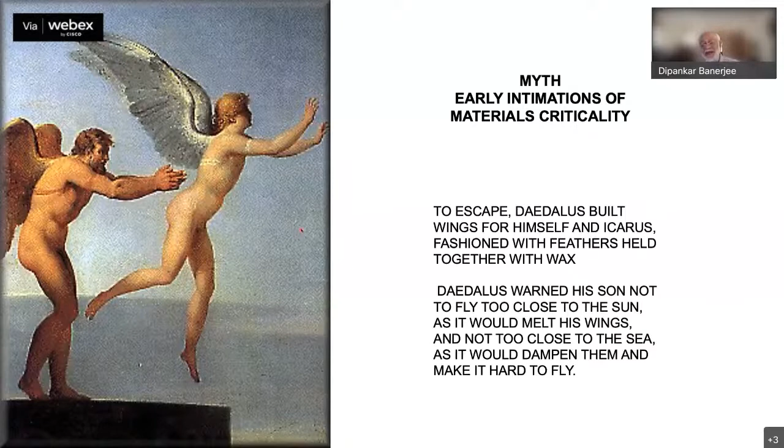So this is a nice parable about materials engineering. It tells you something about the properties of materials, in this case wax. It tells you something about the designer intent and the boundaries within which the materials can be used. And it tells you something about human error as well, because unless you function within the parameters set by the design and the materials, bad things can happen. So this is a good way to understand materials engineering as it is today.

But I also want to remind you that metallurgists, materials people in particular, belong to one of the oldest professions in the world. So first of all, the first great innovation, metal forming, was about 4000 BC, where we learned to soften the native copper, to shape it and to harden it.

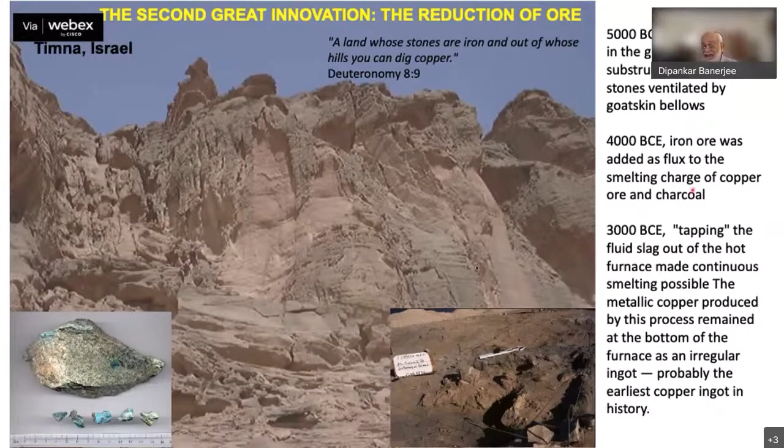The second great innovation involved extraction of copper from its ore, and this was in Israel, again around 4000 BC, using iron ore as a flux and ways to melt this and draw the copper ingot out. And the third great innovation was alloying, in which we learned that tin strengthens cast copper and improves what is today known as bronze, again around 2000 to 3000 BC.

So it's pretty humbling to note that the paradigms in which material science is based, that is the relationship between processing, structure, composition, and properties, these paradigms were actually discovered something like 6,000 years ago.

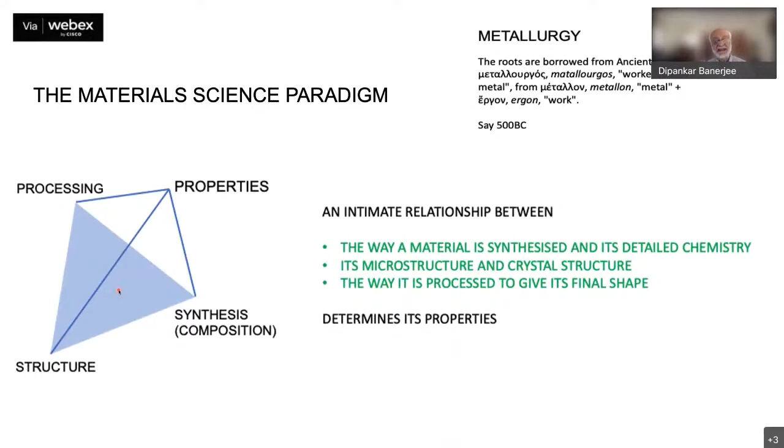I used in the previous slide the idea of structure, and I must talk a little bit about structure, because this is something that most engineers do not recognize as a central feature of materials engineering in this connection between composition, processing, and properties. If you look at a piece of metal, it appears featureless.

But somewhere in the 17th or 18th century, we found that if you prepare the surface of a metal properly, you begin to see features in its surface. And we found that these features actually represent grains or crystals which are oriented in different ways. So you can see today structure at the scale of tens of microns, which could be the grains in the material.

You could see the distribution of crystallites within grains, which could be as fine as 10 to 100 nanometers. You can even today, with modern techniques, see the distribution of atoms within these crystals. So we can see structure at different length scales.

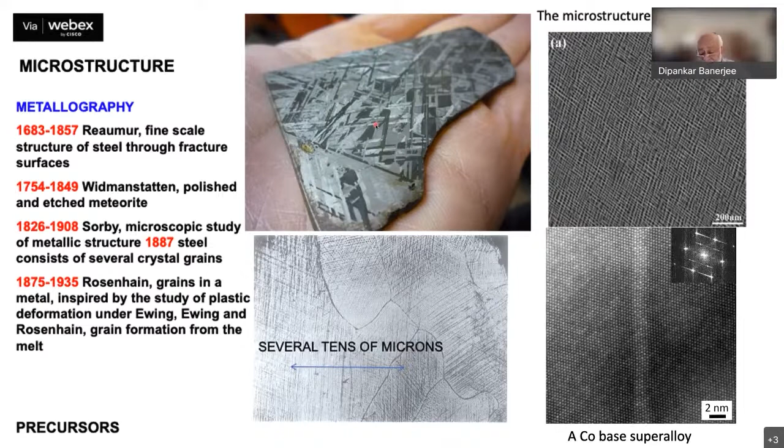We can also see structure when we combine microscopy with spectroscopy. We can see chemistry at this nanometric scale, so we can see the chemistry of individual crystals. We can see the chemistry actually of individual atoms. And through atom probe tomography, we can see distribution of chemical elements in a three-dimensional sense.

And so this very important evolution in our capability to look at what we call microstructure is an important part of the material science paradigm.

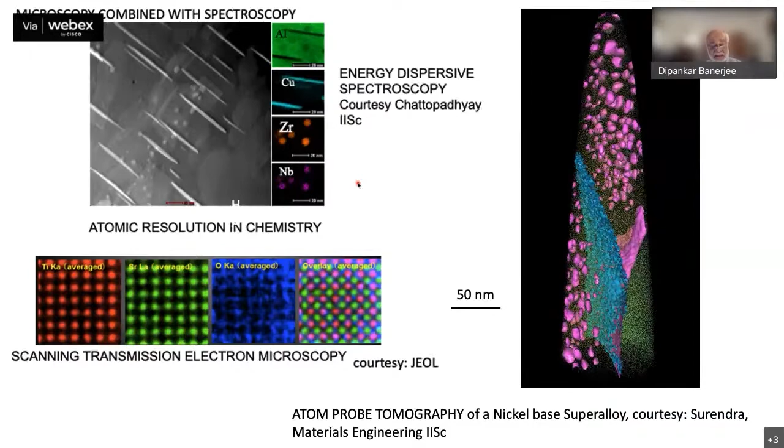So this interaction between defect structure and microstructure to determine properties is a key element of structural materials.

We have learned to process materials at an enormous variety of length scales. 30,000-ton forging presses, for example, are used to make shapes and sizes used in thermal power plants. We can use additive manufacturing to get extremely complex shapes without machining. We can manipulate materials at the thin film level to form integrated circuits. We can form organic-inorganic hybrids, and we can actually manipulate atoms.

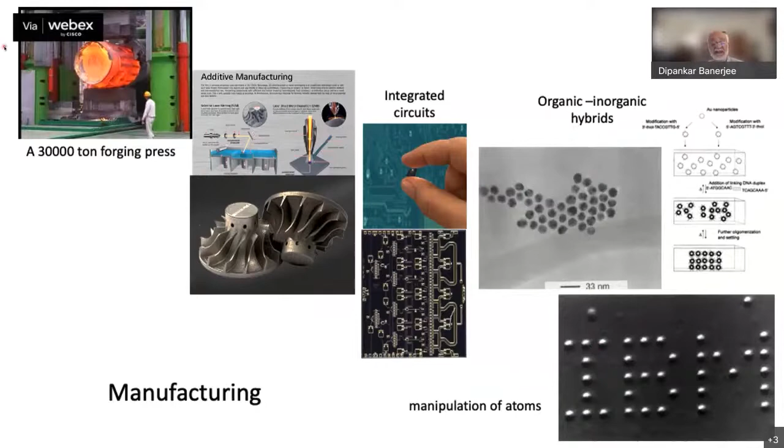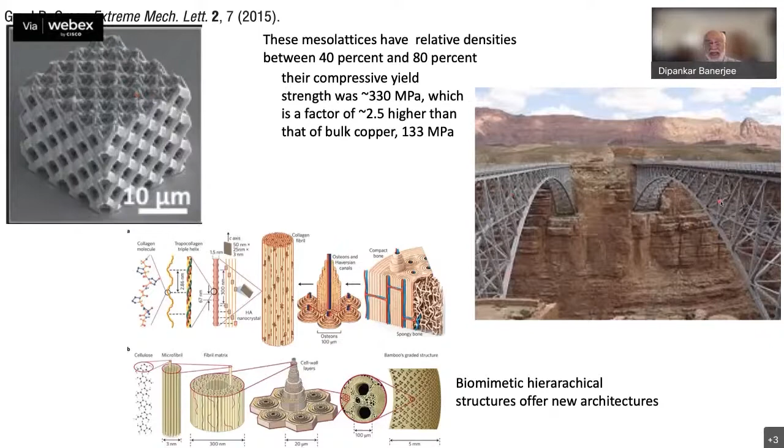This entire range of scales is now available to us as materials engineers to shape the kind of material that we want. We combine microstructure and this ability to manipulate shape with something we call architecture, and we have learned to control the architecture of the metal at micrometer or nanometric scales. We have learned from biological and natural structures how hierarchical structures offer new properties. All of these interact with the object we are trying to make, to provide the kind of properties that we want.

Materials engineering deals with materials at various length scales, but treats materials as heterogeneous aggregates of crystals, chemistry, atoms, and so on. It interacts with the mechanics of materials, which aeronautical or mechanical engineers use, which treats the material as a continuum to develop structural properties or design structures. This interface between materials engineering and mechanics of materials in developing structural integrity is extremely important, and it's important that there is understanding on both sides of this divide on how materials engineers and mechanics people deal with materials in designing structures.

It's important to understand, and this is not very well understood in the non-materials community, that in very conservative applications such as aeronautical applications, it takes an enormously long time to develop new materials. In fact, an article from GE Aviation points out that if you want to introduce a new materials class in an aero engine with no prior application experience, this might take typically 20 plus years. Even the modification of an existing material for a new critical structural component might take up to 4 to 5 years. So what do we do about this?

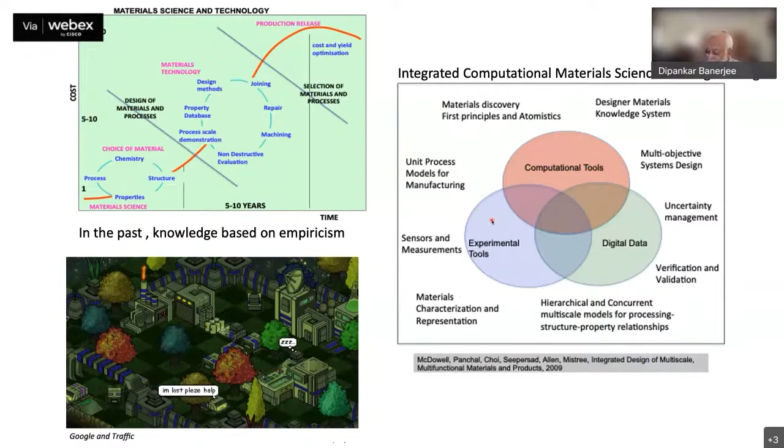Now if you look at aeronautics and the role of materials in aeronautics, we start by looking at energy efficiency in aviation. Over the years we have achieved enormous improvements in energy efficiency, looked at here in terms of aircraft fuel burn per seat relative to the first jet aircraft, the Comet.

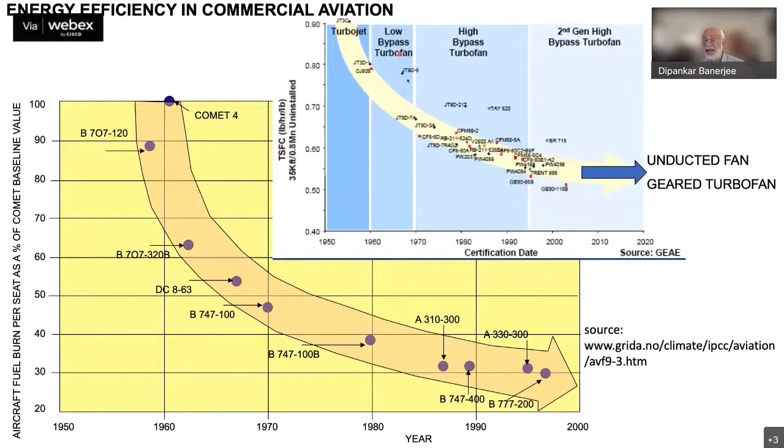We've improved energy efficiency by about 70%, and part of this comes from thrust-specific fuel consumption improvements in jet engines of different designs. A typical combat air patrol of the Tejas, with a radius of action of about 200 kilometers, will use about 4,500 kilograms of fuel. A 10% reduction in structural weight will provide about 2.5 to 5% increase in fuel efficiency.

So amongst the various factors that affect aircraft energy efficiency, the contribution of materials, apart from performance itself, lies in possible weight reductions and in performance through engine thermodynamics, which allows improved engine operating efficiencies. And of course, combat performance metrics are also determined by structural weight.

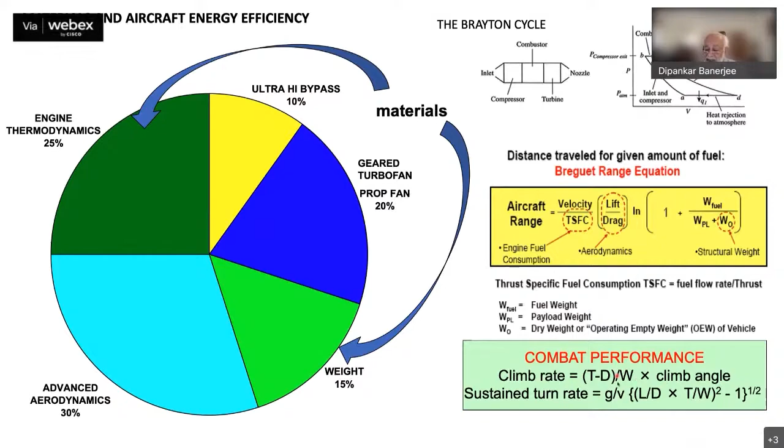If you look at airframes, typically the material you use depends on the sustained Mach number of the vehicle. For high subsonic and low supersonic flight, you're happy to use polymer matrix composites or aluminum because skin heating due to Mach number is limited to about 150 degrees centigrade. As you increase the Mach numbers, skin heating becomes higher, leading to higher airframe skin temperatures, and you have to graduate to different kinds of materials. This fundamentally determines the kind of materials you use in an airframe.

So we start from aluminum used in the First World War to composites, now used in military and commercial aircraft. This is the only aircraft that ever used a titanium airframe, the SR-71, which flew at Mach numbers of about 3.2. Finally, for hypersonic systems, you have to look at refractory materials based on carbon, silicon carbide, and various thermal protection systems.

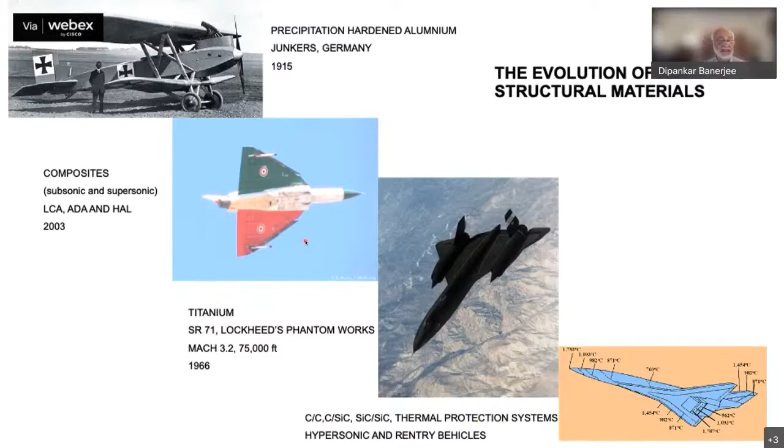I will not talk much about aluminum because aluminum has really given way to composites in critical fuselage applications, due to the lower density of composites as well as their capability to function in environments with moisture, corrosion resistance, and so on.

But I want to use this example as an illustration of the relationship between science and engineering. The basis for aluminum production was in 1886, and the first aluminum copper alloy, known to material scientists as the precipitation hardened alloy, was discovered in 1906. This material was used by the Germans in their First World War military aircraft by 1915. But I want you to note that the understanding of the phenomenon of precipitation hardening from a material science aspect evolved over the next 50 years, far long after it was used in application in 1915.

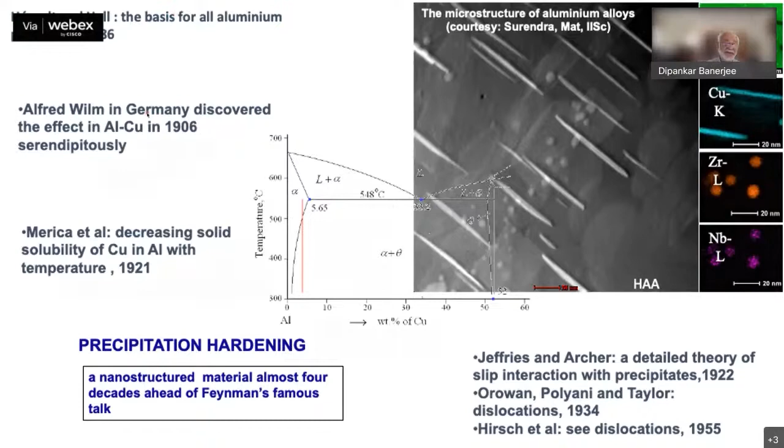So this relationship between science and engineering is not really linear. Science supports engineering, engineering enhances or drives scientific knowledge. Indeed, this improvement in understanding has led to evolution of aluminum alloys with properties well beyond that of the first precipitation hardened aluminum alloy. But now, of course, composites have taken over as airframe materials in subsonic aircraft and so on.

Talking about composites at NAL, you all are so familiar with composite development and manufacturing as part of NAL. But what I want to point out is that there are opportunities for new integrations of material synthesis and design, because you can manipulate composite structure - you can architecture it so as to obtain the precise kind of microstructure needed for the local stresses the material structure will experience.

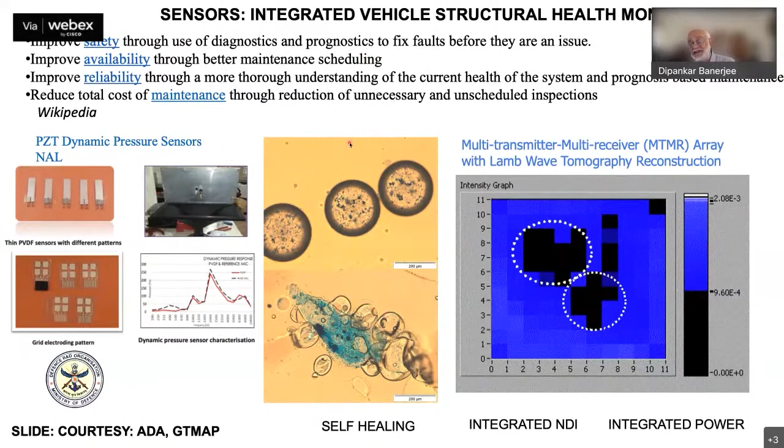For example, bamboo has a higher density of fiber at its surfaces to withstand higher tensile stresses at the surface when it waves in the wind. The other opportunity which composites enable is the embedding of smart sensors and actuators combined with structural design that will allow parts to meet complex multifunctional requirements, such as self-healing and damage assessment. This slide is really an introduction to Ramesh Sundaram's talk later on.

I want to talk briefly about stealth while I talk about airframes. Much of stealth is conferred by shaping the vehicle, as you know. But even as you shape the vehicle, hotspots in terms of radar reflection remain, for example at engine intakes or outlets. You will need materials to provide radar absorption to accommodate what you can do with shaping.

These materials can be very effective, as shown by this near field description of radar reflection with facilities available at the Defense Laboratory in Jodhpur. The varieties of materials that can be used in stealth applications are actually quite enormous, but they can also add to weight. For example, high levels of stealth can add 15 to 20% of structural weight.

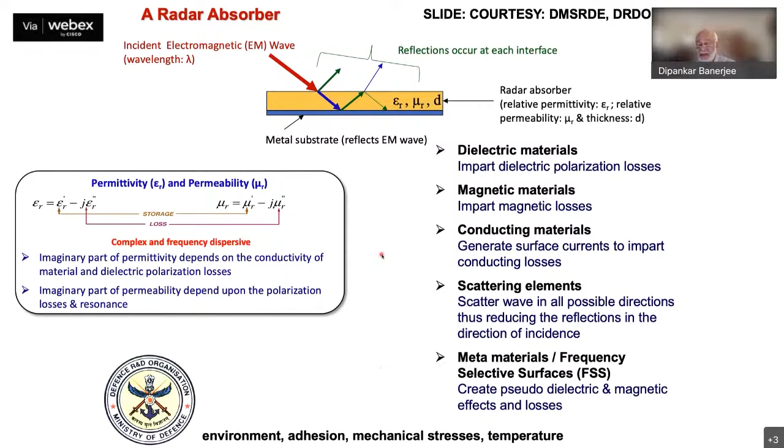So the drivers for stealth are certainly density reduction, but beyond that, broadband absorption capability, mechanical strength, and perhaps frequency selective adaptive protection. The physics of stealth materials is really determined by the physics of electromagnetic wave interaction with the materials. But while understanding the physics, one has to look at the environment, the adhesion of your stealth material to the airframe structure in response to mechanical stresses, temperature, and moisture. The engineering of stealth materials and coatings into airframes is a whole new activity by itself, which we've been doing both in DRDO and at NAL now for quite some time.

I move on to the aero engine. The aero engine is really an extreme environment for materials. Aero engines operate with revolutions of the discs, blades, and shafts at greater than 10,000 revolutions per minute, leading to fatigue. High temperatures lead to oxidation. Birds, sand, and ash ingestion at high velocities lead to various forms of impact damage.

Moisture, impurities in the fuel, and so on can lead to corrosion and erosion. This is truly a difficult, to my mind, one of the most difficult environments for materials, both in terms of design, application, and life.

Three typical classes of materials are used in aero engines. One is titanium, used in the front parts of the engine, the fan and compressor, up to about 550 degrees centigrade. Nickel-based alloys are used in the hottest parts of the engine beyond the combustor, in the turbine, where temperatures can rise as high as 1600 degrees centigrade. And then there is the gradual increasing use of ceramic matrix composites right now in the rear of the engine as convergent, divergent flaps and so on.

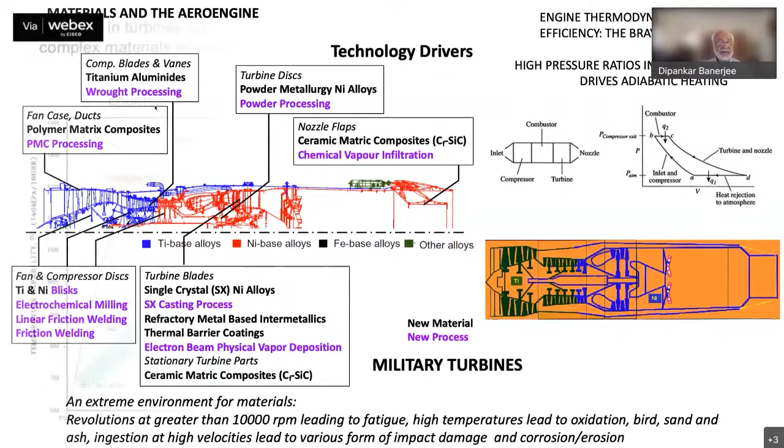Remember that the engine thermodynamics and efficiency depends on the Brayton cycle. So the higher the temperature you can drive the turbine at, the higher the efficiency of the engine. So I'll talk a little bit about turbine materials, particularly the turbine blades and vanes that are used.

With today's nickel-based alloys, remember that the temperature capability of these turbine blades and vanes determines what can be used as the turbine entry temperature and therefore the engine efficiency. The temperature capability of today's nickel-based alloys is around 1100 degrees centigrade.

The turbine entry temperatures in today's engines are about 1600 to 1700 degrees centigrade, and actually are above the melting point of the material, which is typically around 1400 degrees centigrade. So how do you use a material which has capability of about 1100 degrees centigrade, a reasonable fraction of the melting point, when there is this huge gap? We have learned to overcome this.

We've learned to overcome this by internal cooling of these blades and vanes so that the blades are hollow and have these complex channels into which cooling air is driven, taken away from the compressor of the engine.

And finally, you also coat these blades with insulating thermal barrier coatings, usually zirconia or a form of zirconia, together with an oxidation-resistant coating that lies between the substrate and the thermal barrier coating. So this is a complex material system which allows the operation of these materials well beyond their melting point.

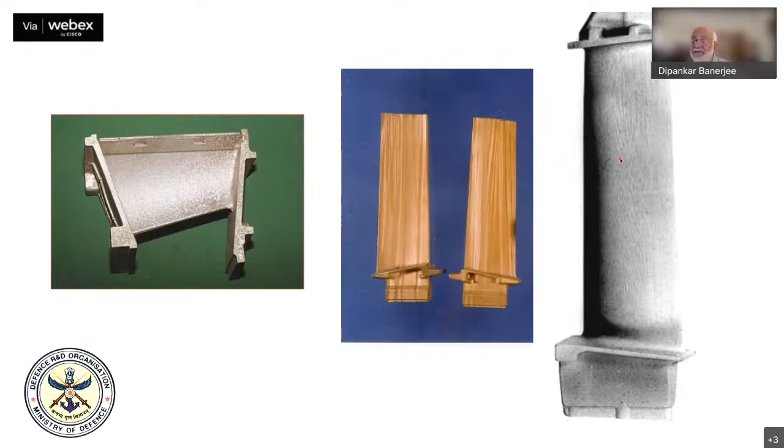So we have gone from castings in which the grains are equiaxed in shape, fine grains, to grains that are columnar in shape and oriented along the loading direction in operation, such that there are no shear stresses acting on the grain boundaries. And then finally, single crystals, which eliminate these weak grain boundaries altogether. So that is one part of the improvement we have achieved.

And this technology of making single crystals is, to me, one of the most marvelous forms of materials technology. There is, first of all, the design of dies for the casting, for these complex aerofoil shapes, incorporating ceramic cores, which will provide these internal cooling channels in the blade.

And you control the thermal gradient such that the heat direction is unidirectional, to provide you with the columnar grain structure or even the single crystals.

Okay, and this is a truly complex technology. You think about it, you're pouring metal at about 1400 degrees centigrade into these hollows which resemble this blade shape, which are sometimes a millimeter or less at the leading edges.

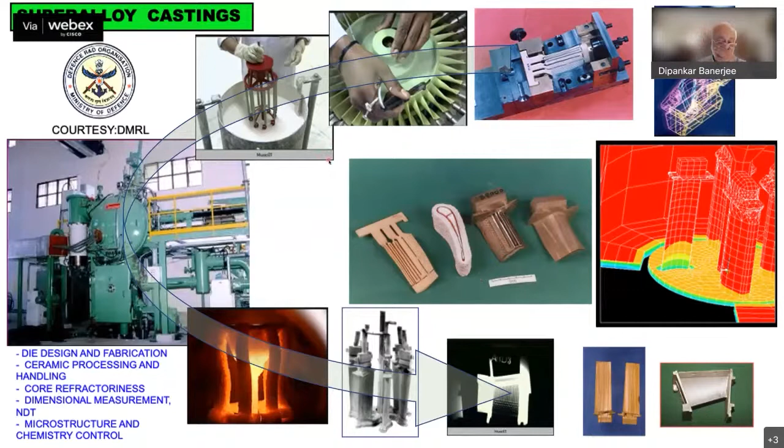And you have to preserve the integrity of the ceramic mold and the core when you're pouring at 1400 degrees centigrade. And you have to accommodate anisotropic metal shrinkage, core shrinkage, mold shrinkage to achieve the final tight tolerances which the aeronautical engineer requires in his aerofoils. But we've learned to master that technology as well.

We've also learned how to improve or understand the metallurgy of the substrate material, which is made of what we call a two-phase material, consisting of a disordered FCC phase and an ordered FCC phase.

If you look at the high-resolution structure of these phases at the interface, you see that the various metals that constitute this single crystal turbine blade are certainly not uniformly distributed. They're distributed differently in this phase and in this crystal, and not uniformly within each crystal either. There is segregation of various kinds, and we have to understand the motion of dislocations or defects within this very complex structure and chemistry. This is the understanding material scientists have developed at the microstructure scale, which finally feeds into the properties that mechanics people use in designing these aerofoil blades.

Remember, as I said earlier, the material is not a single material. It's a complex material system. There is a substrate material, an oxidation-resistant coating, and over that, a thermal barrier coating. We have to understand the micromechanical behavior of this material in relation to the loading of this complex system with a very heterogeneous set of properties. So we have to understand the behavior of these individual materials in the system.

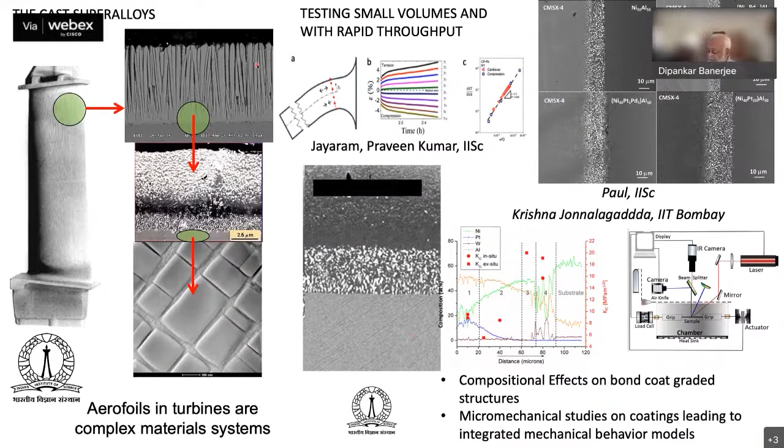Okay, let me move on to titanium, used in the front part of the engines. I want to remind you that we have some of the largest resources of titanium in the world. This is found as black sand on the beach sands of Kerala. It's ilmenite ore, which is an iron titanium oxide ore.

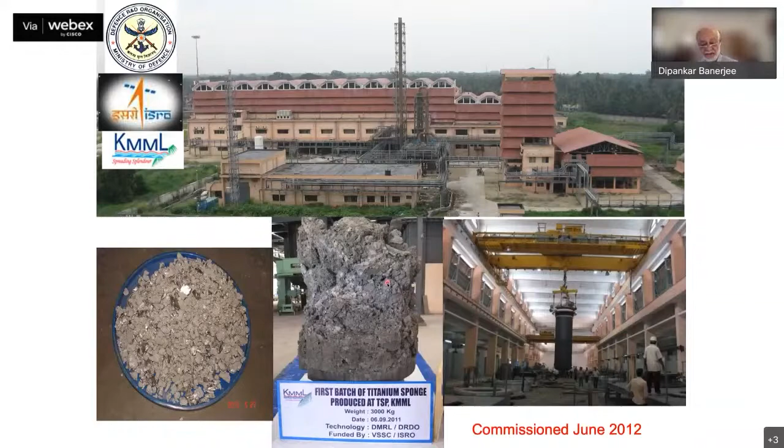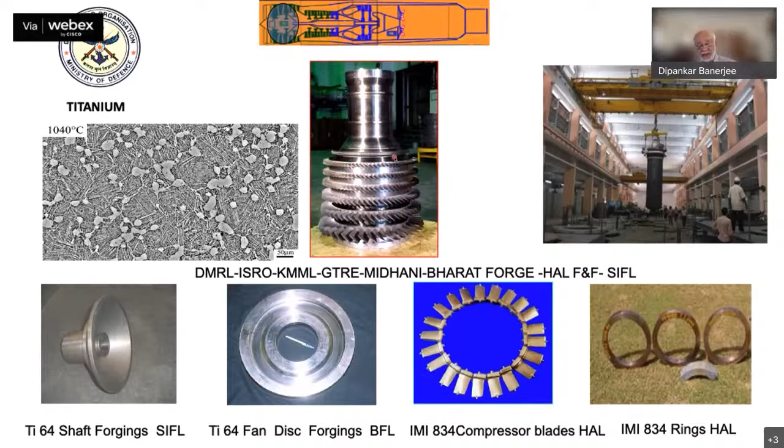We developed the technology at DMRL and transferred the production technology to KMML with ISRO support, creating this facility for producing titanium metal from its ore, which can now be used by MIDHANI and other organizations in this country, both private and public, to produce the shapes, sizes and forms used in aero engines. So we are fairly mature in this titanium technology, starting from ore to final product, and we understand the relationship between composition, processing, and properties quite well in this material.

At the end of the engine, we are looking at silicon carbide-based composites. Somewhere in the early 2000s, while I was still director of DMRL, we supported a national program to develop these silicon carbide composites. This involved making fibers, weaving of fibers, infiltration of fibers, and the National Aeronautical Laboratory set up these facilities and capability for infiltration, which NAL has developed quite extensively.

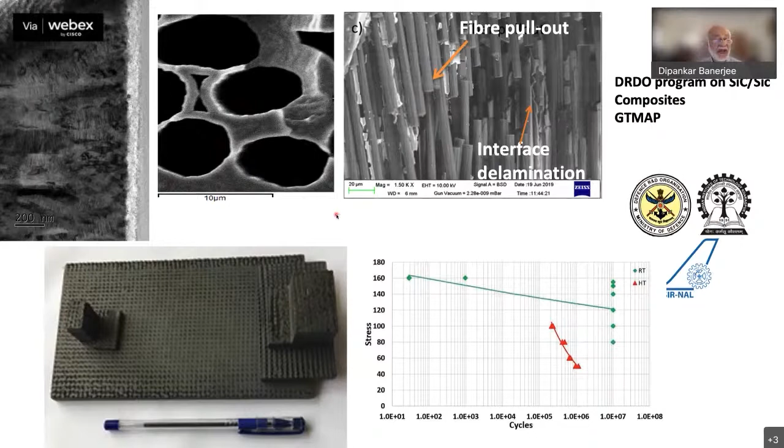Through the support of subsequent programs, NAL has been able to develop these shapes, which represent the convergent divergent flaps in an aero engine. It has been able to understand the structure of the material and the coatings on the fibers as it relates to properties, and these are fatigue properties actually measured by Kalyan Sundaram at NAL. These are collaborative programs between IIT Kharagpur and NAL, supported by gas turbine materials programs of the Aeronautical Research and Development Board.

Where do we go from here in these composites? If you want to migrate these composites into the turbine section, there are very good reasons for doing so. These materials have a higher temperature capability than nickel-based superalloys, and they're lighter. Because they have higher temperature capability, they need not be cooled, and if they don't require cooling, you don't have to extract work out of the compressor to drive cooling air, so you improve engine efficiencies.

These materials must also have coatings to withstand oxidation resistance. But very importantly, you can't use carbon fibers. You have to use silicon carbide fibers in these silicon carbide composites if you want to migrate them into the turbine section, because carbon fibers do not have the oxidation resistance required for long-term applications in aero engines.

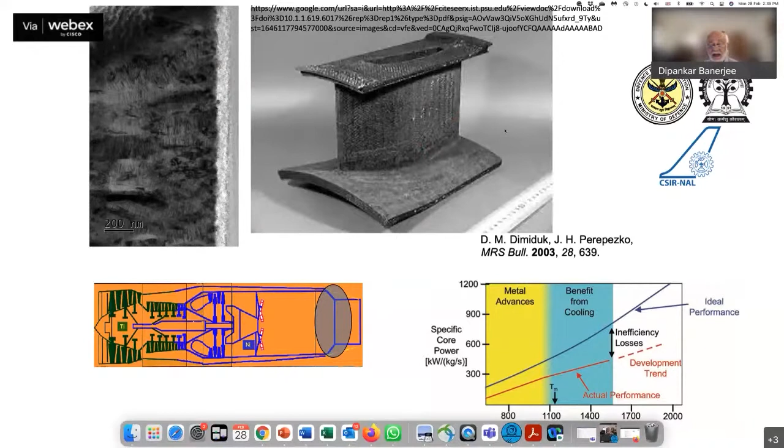One of the disappointments I think I've faced over my career is that, in spite of sustained effort and funding to both NAL and DRDO labs, DMSRD in particular, we have not been able to develop the technology of making these silicon carbide composites. This is unfortunate, but I hope over the next decade or so, this technology will emerge as well.

Okay, I have a problem. I think I'm not able to change. Okay, good.

Finally, I want to conclude with a slide or two to remind you that structures and materials fail in application. This, of course, NAL knows extremely well. One of NAL's significant capabilities is the understanding of failure analysis of materials and the origin of failures.

But what we do in this regard, and this is being done at DMRL, at GTRE, and so on, is to understand the effect of service spectrum, component loading, and materials properties on failure probability assessment. This is an extremely important part of material science and engineering, combined with the in-situ health monitoring, which Ramesh is going to talk about. Remember that the majority of critical materials actually fail by fatigue, by and large.

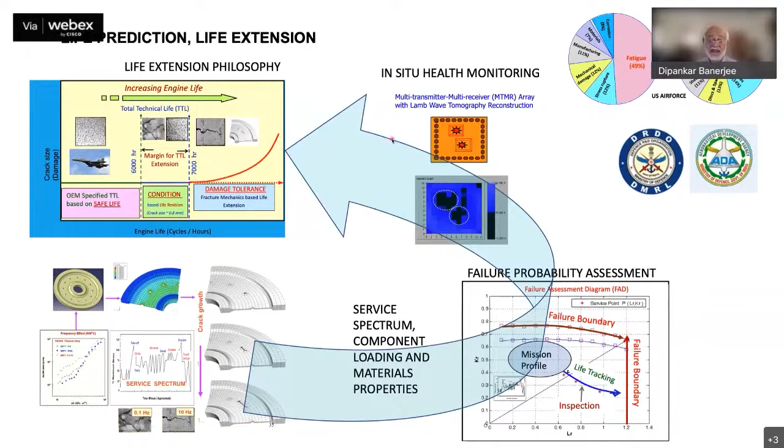You then have to develop, in combination with all this, a good life extension philosophy, both for legacy materials and indeed a lifing philosophy for new materials. So all of this is quite a distinct material science, technology, structural mechanics, and health monitoring endeavor that must be pursued over the coming decade or so.

This combined platform, rather than looking at each of these as individual elements, which we've tended to do in the past, we hope will accelerate materials insertion into service.

We have tried to support the materials ecosystem in aeronautical engineering through the Aeronautical Research and Development Board. I want to particularly refer you to the gas turbine materials and process program, which we initiated about five years back. The idea was that there is this interaction between the operational environment at one extreme, the systems environment somewhere in the middle, and laboratory research and proof of concept work at the other.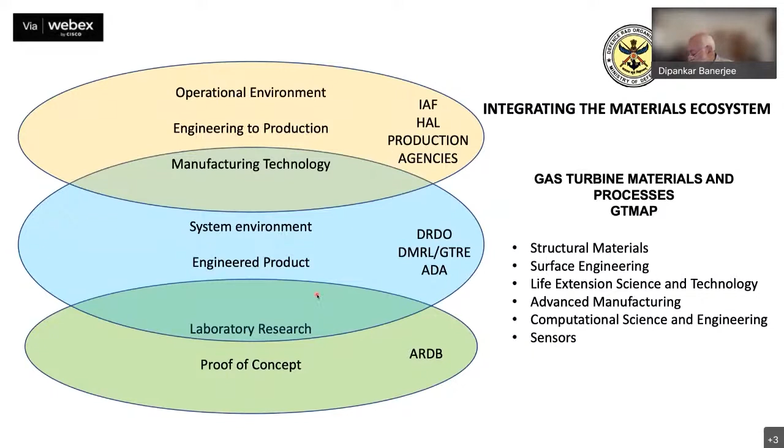So with that, I want to thank you again for giving me the opportunity to talk a little bit about materials in general and the way we as material science and engineers do our work, the way we integrate with the structural mechanics people who actually design structures, and the way we combine this interaction in what we have done with aeronautical materials in this country. Thank you very much for your attention.

Thank you, sir, for a very interesting and informative lecture on materials for flight.

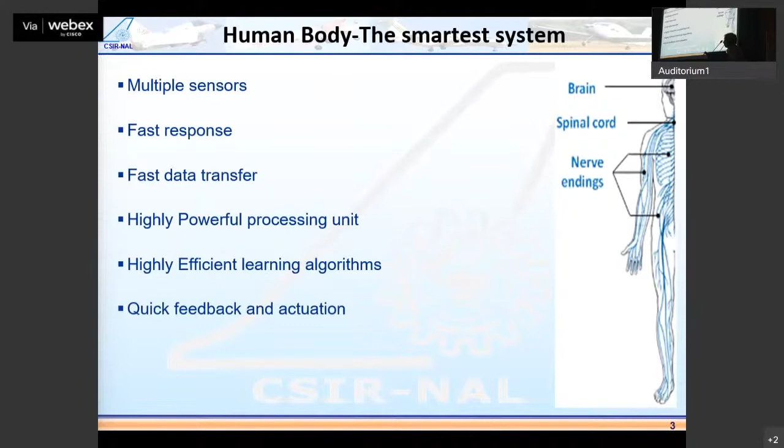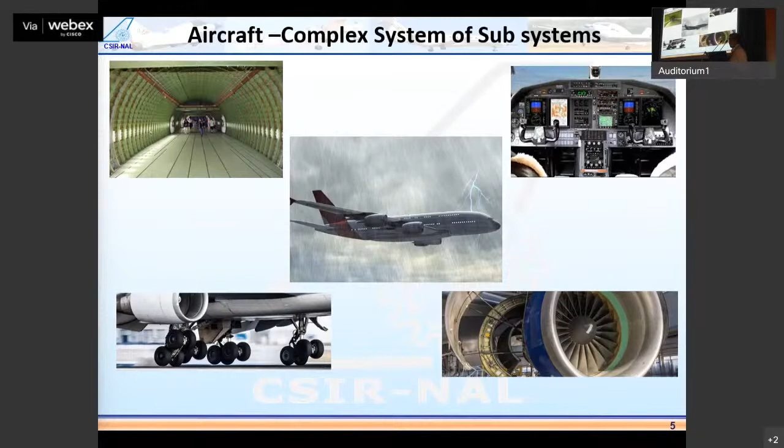Our focus is primarily on aircraft, and within the aircraft, we know that structures are probably at a lower level of requirement for health monitoring compared to engines, avionics, and several other complex systems which have very challenging requirements. Within the structures, we're looking at some of the composite structures - what is special about these composite structures, why do we need health monitoring, and what benefit will this health monitoring give?

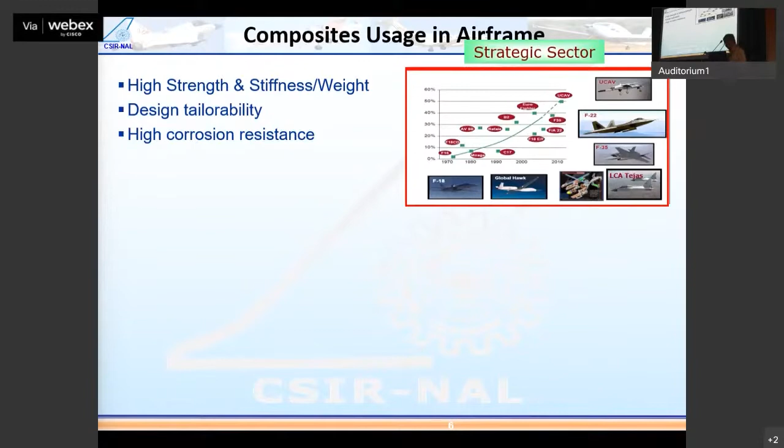If you look at the structures that have been made, I'm happy to say that for both the combat aircraft and Saras aircraft, NAL and in particular ACD have made a lot of contributions to these programs. What we have developed are highly co-cured structures with a lot of integral construction. You can see a large number of structures have been developed, and we're also happy to say a lot of this has become production technology today.

We have tied up with Tata Advanced Systems Limited, and nearly 40 sets, 35 sets of parts have been supplied by them for the program. We've developed a large number of parts for the Saras aircraft, and now we are increasing - some of the fuselage will also become part of the next generation Saras.

So when we look at these composite structures, what do we mean by integral construction? You can see the stringers, the skin, or the ribs - they're all made in one single shot. So where is the weak point in this? This is the interface between these two.

If there is a debond in these structures, we would like to know ahead of time. Also, what happens in such large structures, especially a wing or similar components - what are the principal kinds of damage we are faced with? It is mainly impact damage that composites are really bothered with.

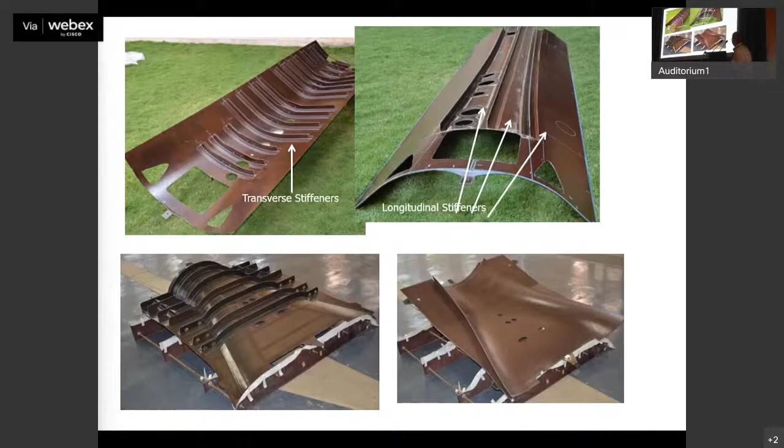One of the interesting things about composites is it looks very nice from the outside, but you could have a lot more damage within the structure. That's why these are called BVIDs - barely visible impact damage. So when you look at it from the outside, you hardly even know there is damage inside. It is all the more important to find out what this damage is in the structure.

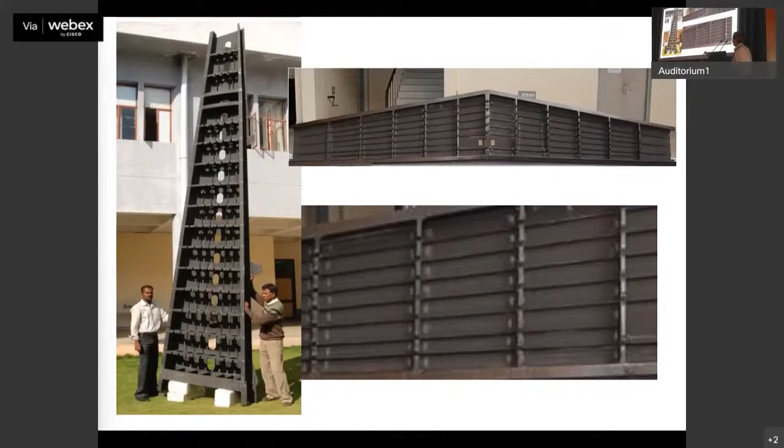So these are some more composite structures. This is developed by infusion technology, and you can see nearly 334 individual parts have been made as one single part.

So when we look at aircraft health monitoring or inspection being done today, you have daily inspections, A checks, B checks, C checks. There is a lot of money involved in inspecting these structures. This is called periodic maintenance.

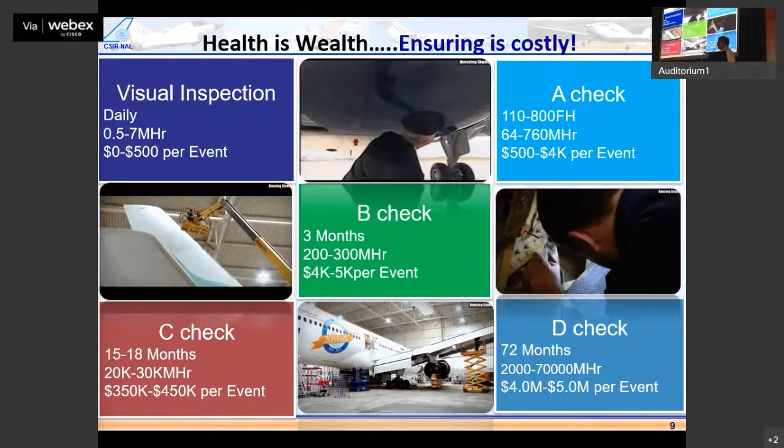The paradigm shift the world is looking at is, can we move from this maintenance to a maintenance on demand? Can I have sensors, can I have systems that will actually tell you the state of the structure, the health of the structure, so that I can go and inspect it when I need to, and get away from periodic maintenance? That is the overall goal.

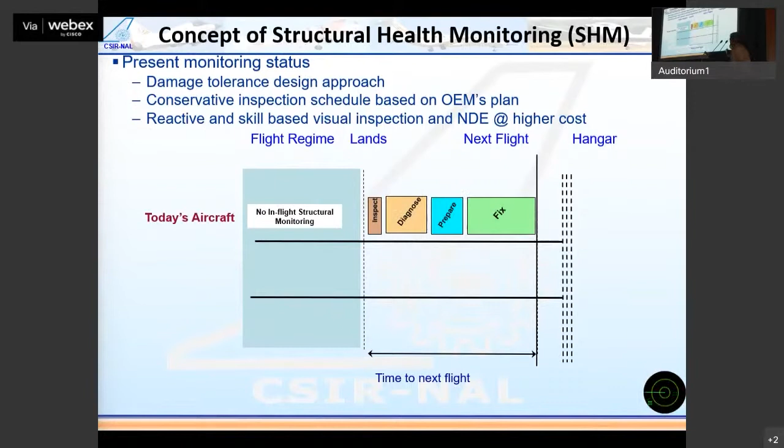If you look at present aircraft, practically there is no health monitoring in place. So everything takes place after the aircraft lands - you find out what has happened to it, what the damage is, and then you try to fix it.

What is next generation is, as the aircraft is flying, can I get the information on ground? So before the aircraft has landed, we know this is the kind of damage, this is the kind of problem - and this is not only applicable to structures, it's applicable to all kinds of problems on the aircraft. As soon as the aircraft lands, I can fix it, and you save time.

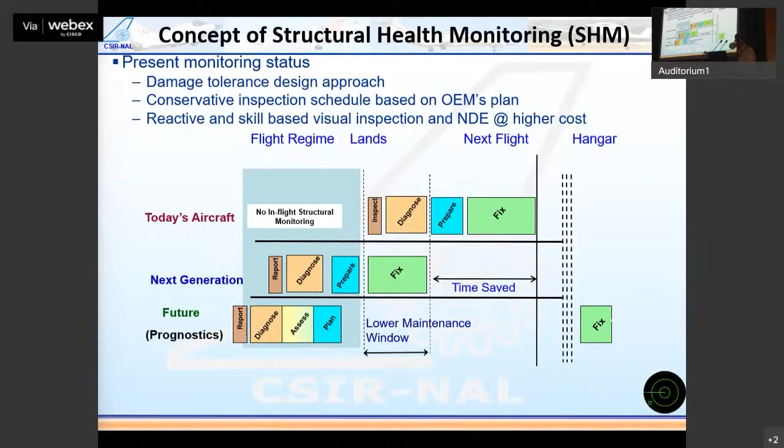What the future generation offers is having all the prognostics built in. I continuously have all the information. I know when I really have to inspect it - I don't really have to inspect it at all here. I know what the life of the structure is, and I can go fix it later. So you have a huge time window you can save if you have a complete health management system in place.

So one is a reactive approach where you just get information, and then you move to a proactive approach. When we want to do this, it is quite a complex system because you have a number of challenges that have to be addressed.

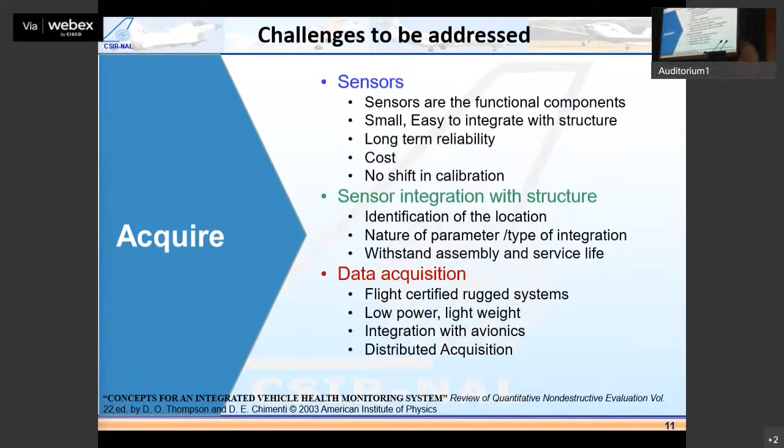First of all, what are the sensors? You have so many different sensors to choose from - which sensor should you choose? How do you integrate these sensors into a structure? How do you collect the data without loss, without false negatives, without false alarms that you're going to give to anybody? How do you build a robust system? These are all the challenges one has.

When we look at the various kinds of sensors, what I'm going to be focusing on today is fiber optics - we have done a lot of work with this. This is just the normal optical fiber that you see, which we use for communication purposes. It is something very similar to that which we want to use.

So what is the advantage? It is lightweight, small in size, very easy to integrate into a structure. This is where composites become amenable so we can embed these if you want, or do surface bonding if you want. Since they operate in the optic domain, they don't have any EMI interference, electrical interference - the power consumption is very low.

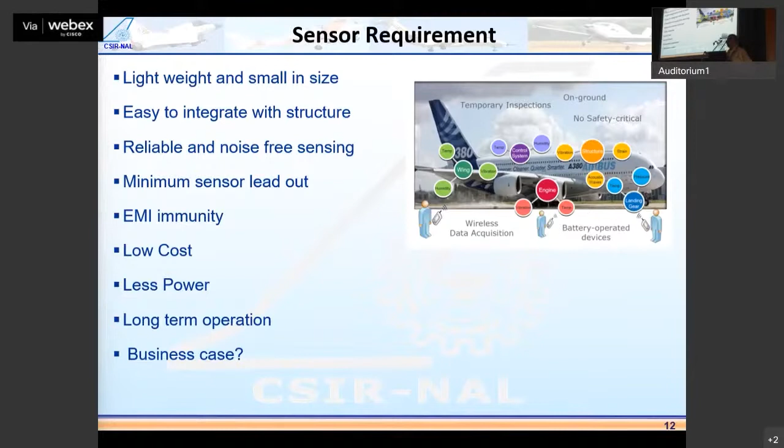But with all this, the real thing we are battling today is, does it make a business case with the way we are designing structures today?

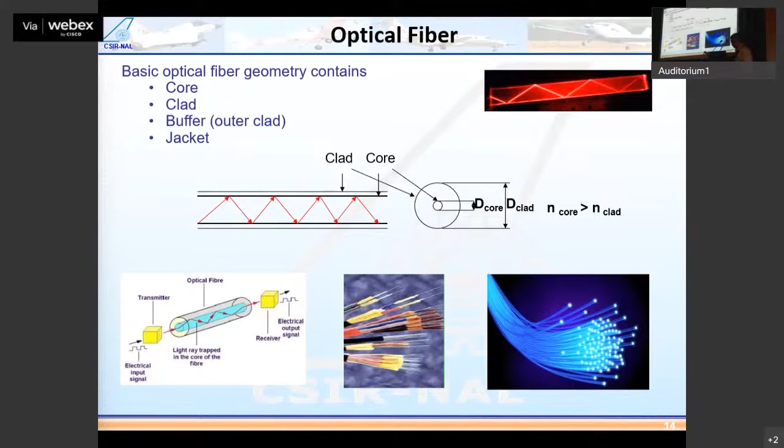So very basic, a fiber has a core and a clad, and based on the differential refractive index, the light just gets reflected and goes through from one end to the other end. That's the bare optical fiber.

You can have different kinds of sensors. I will not get into those details. You can have a sensing element at one end, or you can have a sensor at a predefined location on the fiber, or, like I said, most of the fiber itself becomes a sensor.

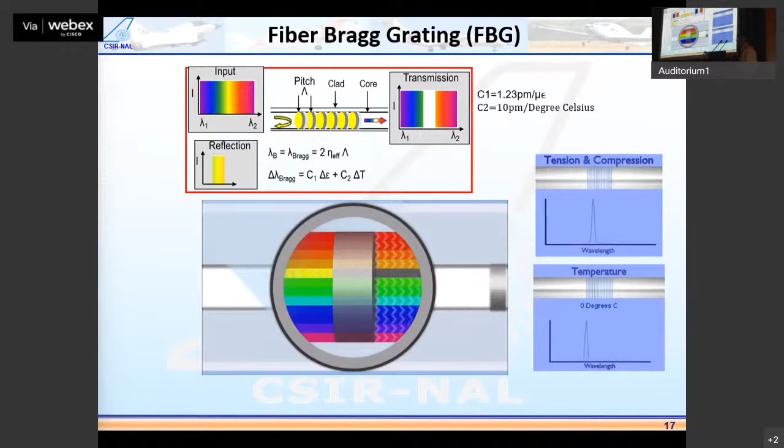So this is the basic equation. When you do either tension or compression, this wavelength will shift, and it also shifts due to temperature. So this is one of the problems we have with fiber optic sensors, that they are sensitive to both strain and temperature. So you have to develop different algorithms to compensate for the temperature shift. I will not get into how the FBGs are fabricated today.

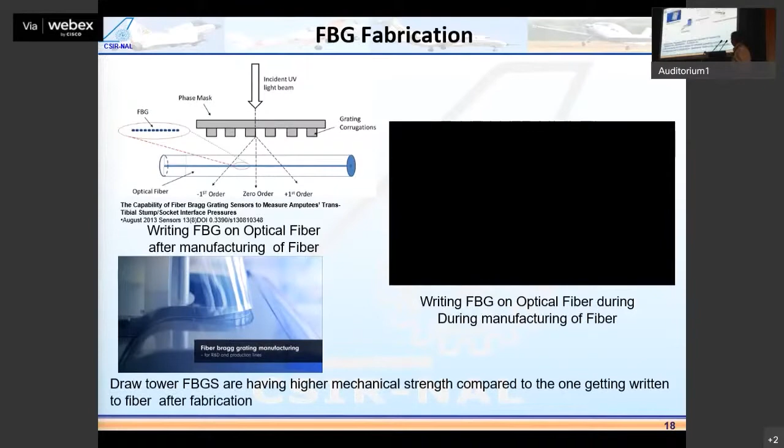The other important thing is how do you package this? You have to see that when I'm measuring both strain and temperature, how do I compensate for the temperature, because most of the time we are interested only in the strain? You can also measure acceleration and pressure. So how do we pack all these things into our system?

The other aspect of this project, we did a number of projects with DISMAS from ADA, and then programs under AR&DB. We had certifying agencies involved, and they wanted to know the effect of these fibers, though in small quantity, if incorporated into composites, is there any problem? So we had to do a lot of property testing at room temperature, high temperature, static testing, fatigue testing, and we showed there is no problem. From the certification agency we got the approval.

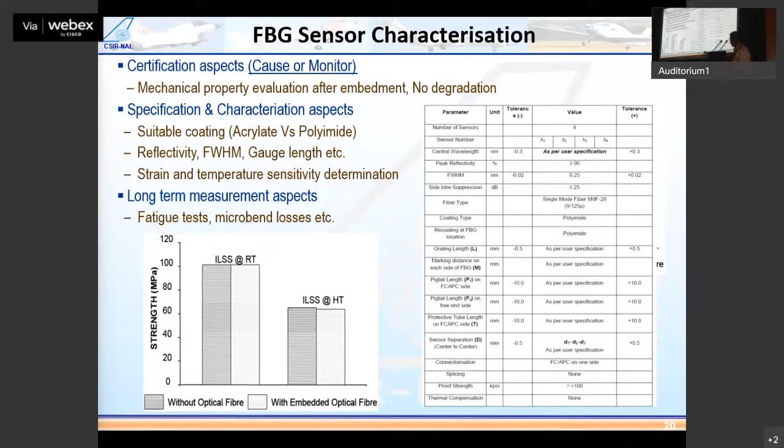These are all the host of specifications one has to choose when selecting a fiber Bragg grating system. These are called the interrogating systems. We have also had programs within India where IISc and CSIR-NAL have tried to develop these systems.

This is from a company called Smart Fibres, and you can see these are very, very light. This whole thing may be about a kilogram and a half, and you can have 4, or 2, or 8 channels. Within each channel I can connect a fiber with as many as 16 sensors, but that will depend on the level of strain you want to measure. Typically we go for 4-channel systems, and in each you can connect a fiber where you can measure about 6 to 8 sensors.

Somewhere in 2009, we also came across this technology, which has its own advantages. The entire fiber is a sensor. What we are really looking at here is Rayleigh-based backscattering. When the light is launched, at every predetermined point of the fiber, you get a backscattering back into the interrogator.

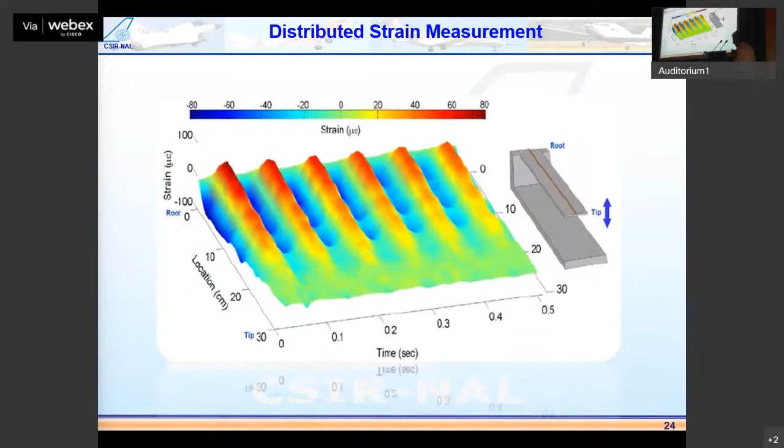And so you can actually find the strain. If I have a 10-meter fiber, every 5 millimeters, I can find the strain at that point. This is a phenomenal application. If you have a simple cantilever beam, you can put a fiber and get the entire strain profile from one end to the other end. So I'm doing a static test. You can all see we're doing a lot of static testing.

So it's a phenomenal tool that you can use for testing and easily tell you what is happening, either in flight or on ground or in testing. This is a huge technology that can be used.

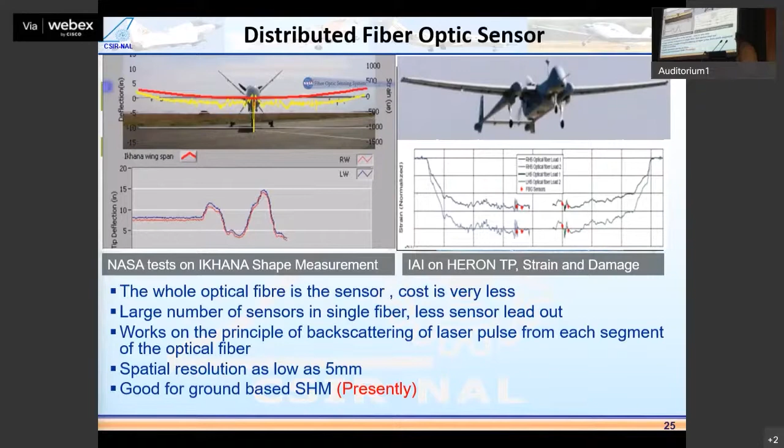One of the problems with the optic fiber is it's very brittle. If you turn it around the radius, it can break easily. So how do you package these? How do you integrate these into the structure? You have to find soft ingress egress points. So all this we have done over many programs, and now we have got very good packaging systems available for putting these onto the aircraft.

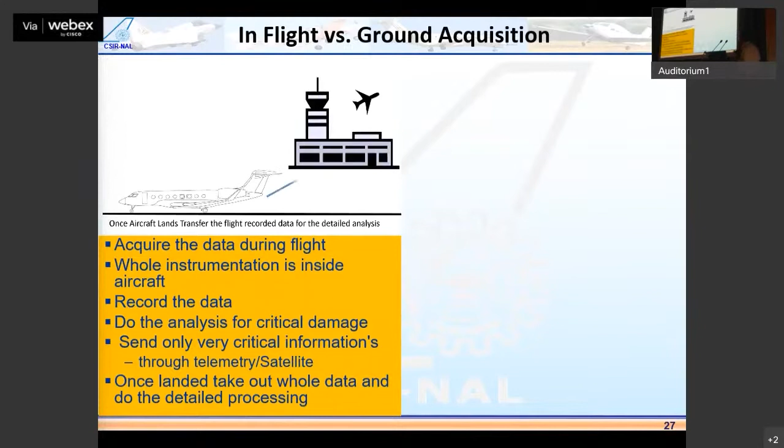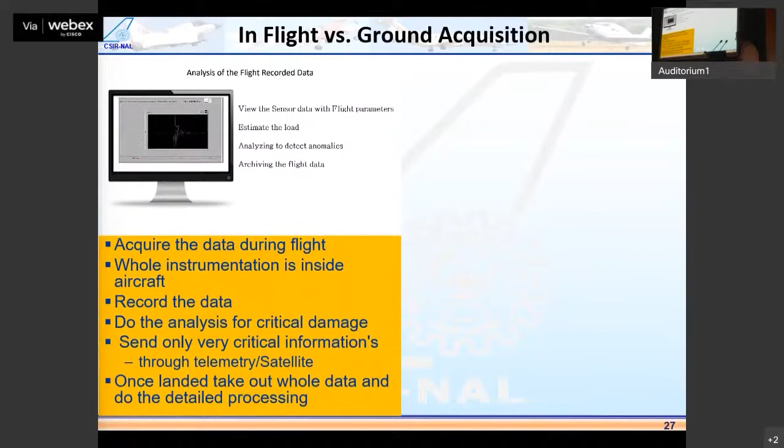Now when you broadly see health monitoring, you can have two broad classifications. Either I want to do it in flight or I can do it on ground. When I say in flight, I want to acquire all the data in flight. The instrument is inside the aircraft, I record it over there, and I can choose either to do the analysis there or after it lands, or remotely transmit via telemetry if it's a UAV. These are the choices. The other choice is I put only the sensor on the aircraft.

And when the aircraft lands, I take a measurement. Based on this data, I give a decision on whether there is a damage or not. This is today probably a much easier thing to implement because I don't have to put many systems on the aircraft. Certification and so many problems can be avoided, and I can have just a system on ground, instrument the aircraft. This is what we are doing, we have a program with ADE for the Swift UAV. We have done this. We are awaiting flight trials.

This slide just shows you that the most important damage that we are looking for is the impact damage. Suppose I have a 30 or 35 meter wing and somebody just comes and drops something on the wing. Can I tell that I had a drop? There are different levels. Can I tell something is wrong? Can I tell where is the location? Next, can I tell what is the damage size? Then can I also say something will go wrong soon?

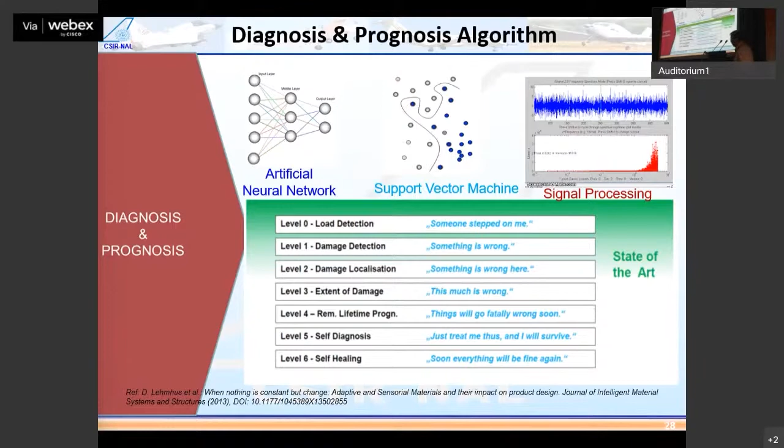Like I said, we have done a lot of studies. What I'm showing you are just snapshots of slides which actually took quite a long time to do - a lot of sensor characterization, how to install these sensors, what kind of instrumentation is needed for both flight and offline, how to route these fibers within an airplane, how to have connectors to connect it to patch cords. This is a system we have actually done on the Nishant UAV, and we have done a lot of ground tests as well as flight tests.

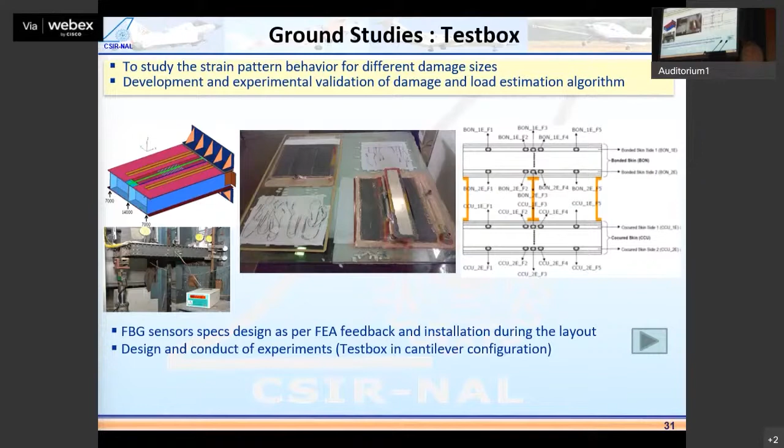So let's take a simple case of a test box. This is a top skin with three spars running, and only in the middle spar have we created a debond. We did not tell the person that there is a debond, and we put these sensors onto that. As we load this, you can see there are three spars here - I-spar, C-spar - and then we load it, we've got these sensors in there, and we capture the data, and the straight line is the healthy line.

As we get closer to damage, the strain is a function of the change in stiffness, and you can see the change - very easily we can capture that there is a damage. But one of the problems is the change in strain is very local, so this is one of the challenges. The sensors have to be close to the damage, so how do I make a network of sensors that are close enough to capture this?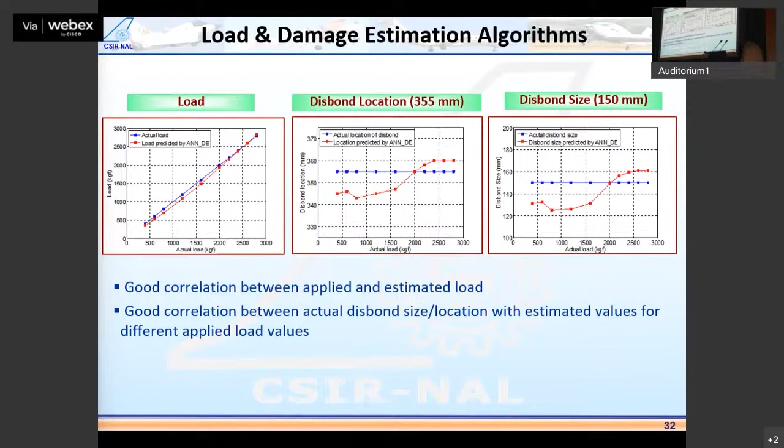When we were part of the Center of Excellence under a program called ACE-COST, ARDB Center of Excellence for Composites, we had a program asking: as soon as an impact takes place, can you immediately find out the location and damage in a structure? So we did a lot of studies, starting from flat laminates to stringer panels, and across all the box levels, we can see the probability of detection at nearly 90%. Within 50-60 mm, you can find out the location.

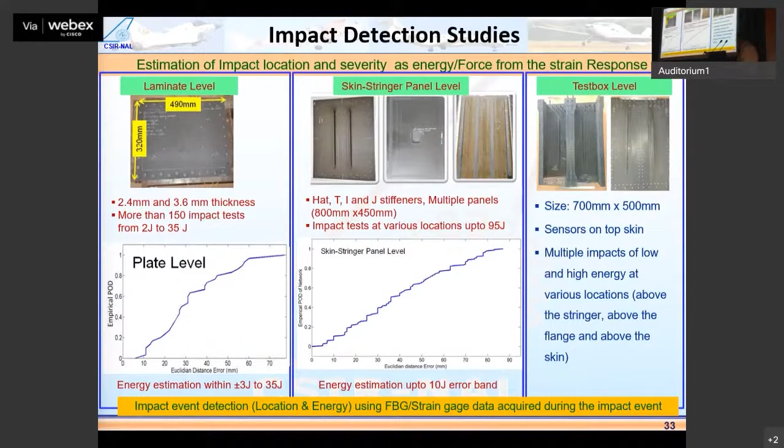So imagine I have a 10 meter or 20 meter wing, and if I can tell you the location of a damage within 50 mm, I think it's a marvelous technology which we have. The key challenge is still how closely we can find the damage sites. And this is using the distributed fiber.

When you actually look at the signal, you can see there is not much difference. So there's a lot of intelligence the team has put in to develop the algorithms for how to do this, called successive differentiation, to find out all these damage sizes.

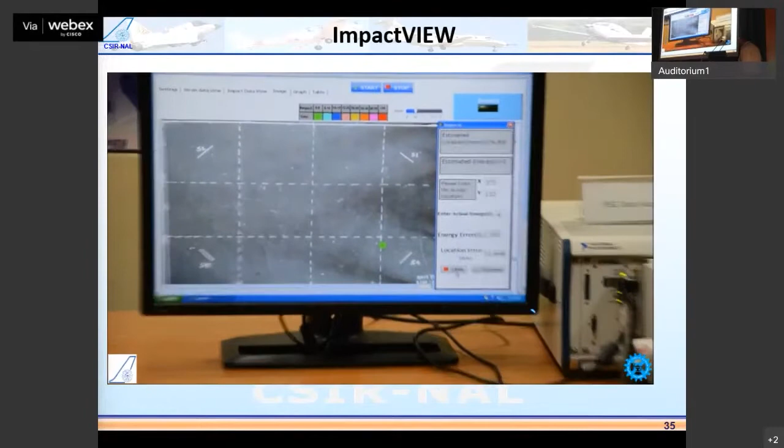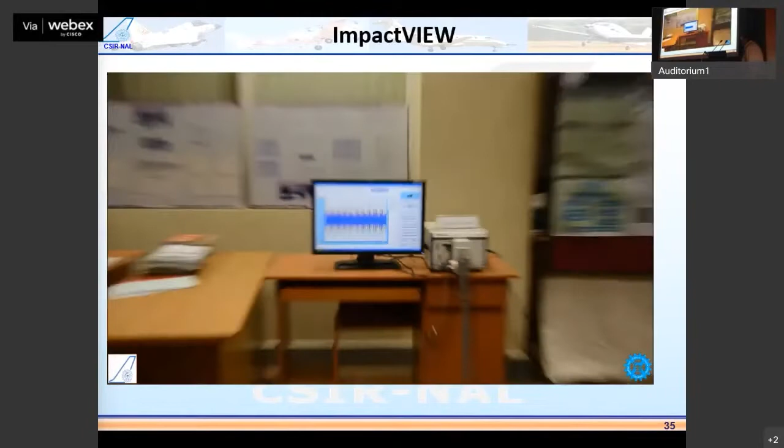I have one more video here. You can see, on this side we have a drop. The weight is getting dropped, and instantaneously it tells you the location. So the weight drops, and immediately you know where it is located. All this was demonstrated, and this technology, as part of ACE-COST, we successfully developed and showed it to them.

We've also done flight trials where we mounted the sensors on the bottom spar cap, and Nitesh here actually flew with the pilot, and this is where the sensors are put. A number of flight trials were done. We got good correlation between the strains measured and through the FEM.

Another interesting project we had was along with ADE, Israel Aircraft Industries, and Tel Aviv University. The subject was the boom of the Nishant. Can we instrument it? Can we put these sensors and the acquisition system and actually get the data? The Nishant is a very interesting animal.

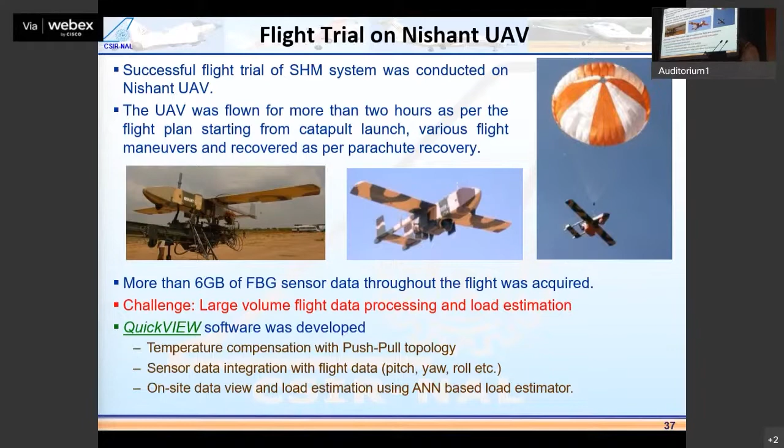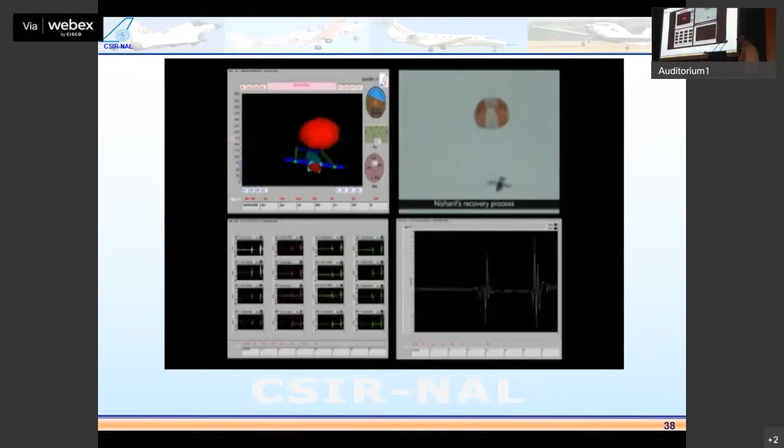You can see it is catapult launched. It launches in a catapult, then after flying for some time, you can see all the strains are getting recorded. And of course, this is the camera, that we have nothing to do with - the Nishant is taking the photographs. Then it opens the parachute and it lands.

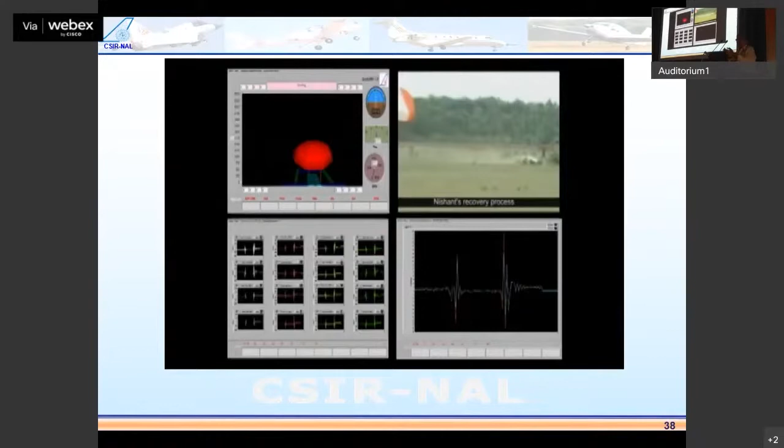Interestingly, when we did this around 10 o'clock in the morning, it actually crashed into a field. So we all went at around 9:30, 10, very worried whether we actually captured the data. But the entire system was made in such a rugged way that, with all that, the entire data was captured - the flight data, the catapult launch, the parachute recovery. In fact, we also showed buckling of one of the booms taking place.

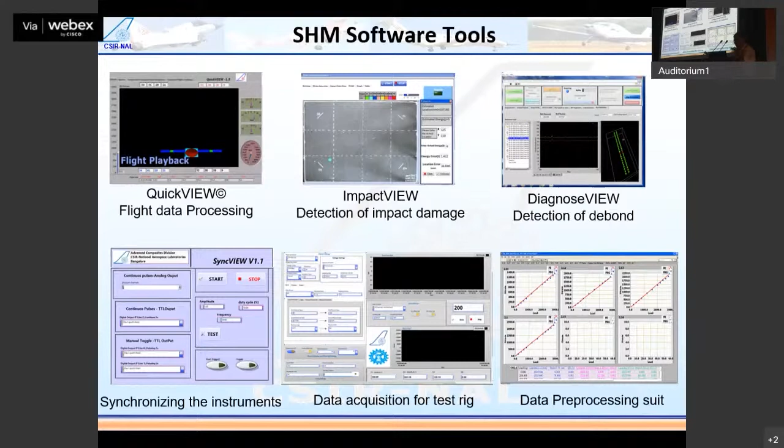Quite a lot of work has been done in flight also. A number of tools: quick view, impact view - Nitesh loves all these fancy names - diagnose view. A lot of this has also been copyrighted as software.

We are moving into another technology called visual inspection. Can I just have quadcopters go over the aircraft, take pictures, and tell you the health of the structure? Our team has done some work on this, and a lot of this is also going on in Airbus and other manufacturing companies, because this probably will become the best business case. Because I don't have to put any sensors on the aircraft, I don't have to fly any instrument on the aircraft - when the aircraft lands, I just have something flying over it, collecting images and telling you the health of the structure.

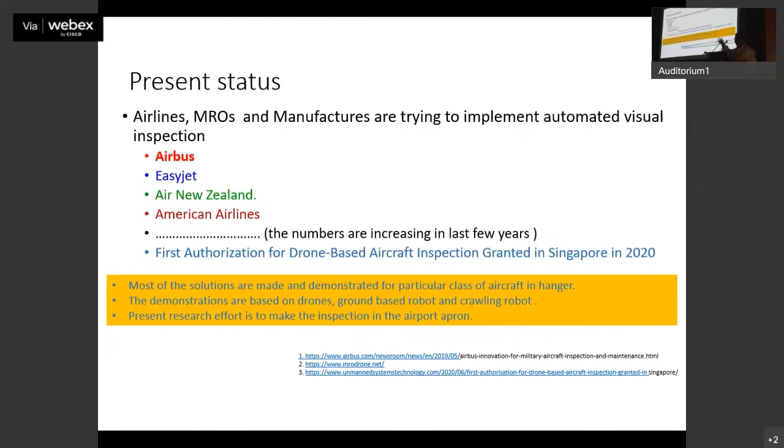So we have done work on this, where you actually take a projector and project a pattern, then study the fringes. You can actually capture the dent depths very well. In composites, once you know the dent depth, for that thickness, you can correlate what is the damage within the structure. This is an interesting area we are pursuing, and we haven't progressed too much, but we have done initial studies which are very promising.

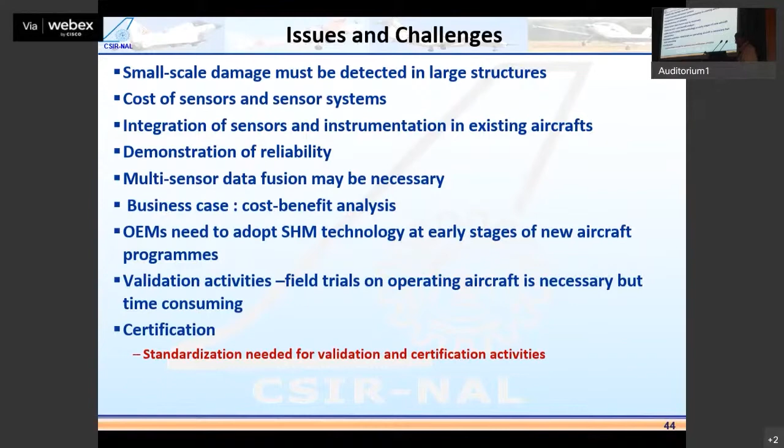Several issues and challenges are there. You have to look at what kind of damage, how to put these sensors close enough, reliability - you don't want any false alarms - field trials, certification, and the business case has to be done.

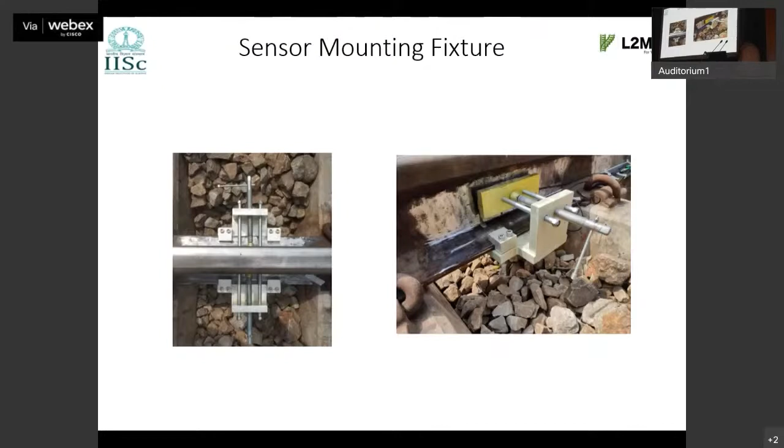So in the last 6 months, a very short time, our team has put these sensors on the track. There's a company called L2M - lab to business, lab to market. And you can see these are the sensors we have actually put on the rails.

And you can see we have put sensors like this, and that is just the packaging done here. And we have collected the data. Every day so many trains go, so we've got very repeatable data. And they are also very excited because they've worked with a lot of imported sensors from China and nothing is repeating.

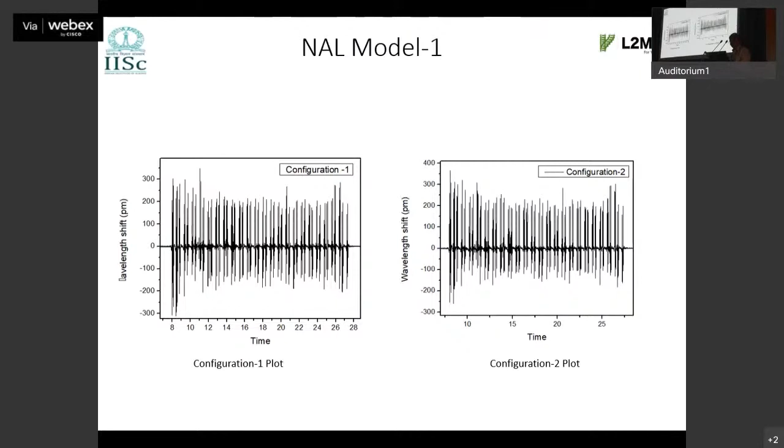None of these technologies are available from abroad. So what is the requirement? They have something like 8 lakh sensors needed for the rolling stock and number of structures, something like a $1.6 billion business. And railways is now looking at how to encash this. So we also are looking at a collaboration where we can use our FBG technology, which we used for aircraft.

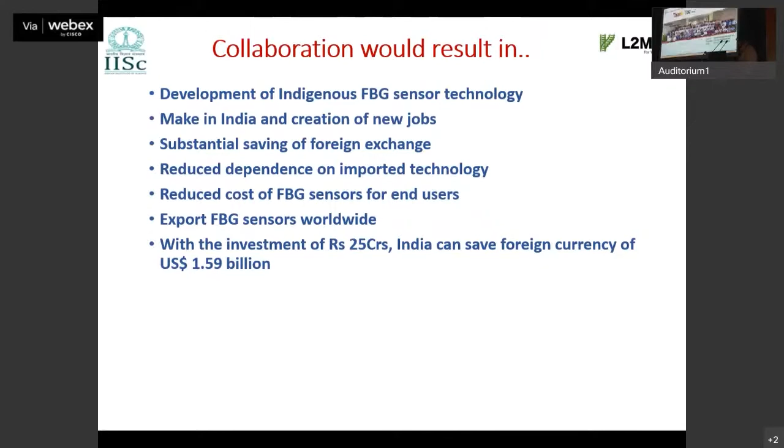And put it to the railways, where we can make a substantial difference to the health monitoring of railways in the future. I think with that I'll end. Thank you all, this is by our large team. Though we say health monitoring is a small team, we have people who do the ND, the coupon level testing, structural testing. A large number of people in the division are involved in these projects, and that's why I think it makes it a very good composite.